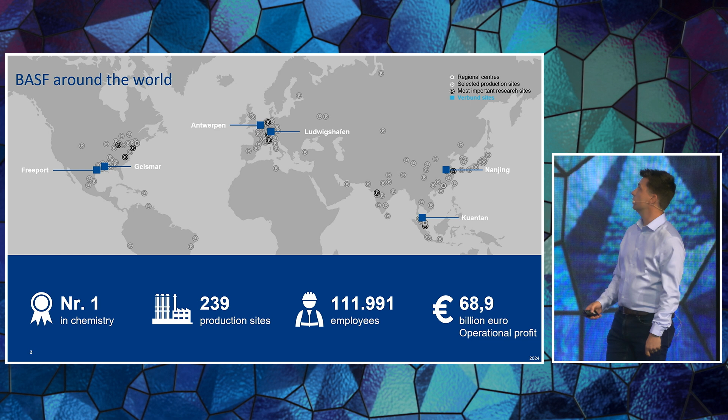For this use case, we will focus on BASF Antwerp. BASF Antwerp is the largest chemical production site in Belgium and the second largest of the BASF group worldwide. This BASF Antwerp covers 6 square kilometers.

We have more than 50 plants. These 50 plants are maintained every day by more than 3,700 BASF employees, approximately 1,000 partner employees, and 2,000 contractors. All these plants are connected with each other with 65 kilometers of road.

54 kilometers of railroad, and more than 1,000 kilometers of pipelines. We have a turnover of almost 6 billion euros, and because we are the second largest of the BASF group, we invest annually, in the year 2024, more than 248 million euros.

To get an idea of the size of our PI environment, we have 220 PI interfaces which are collecting data over the whole site. And all these data points, the 275,000 tags, will be stored in our PI historian. We do it for a long time.

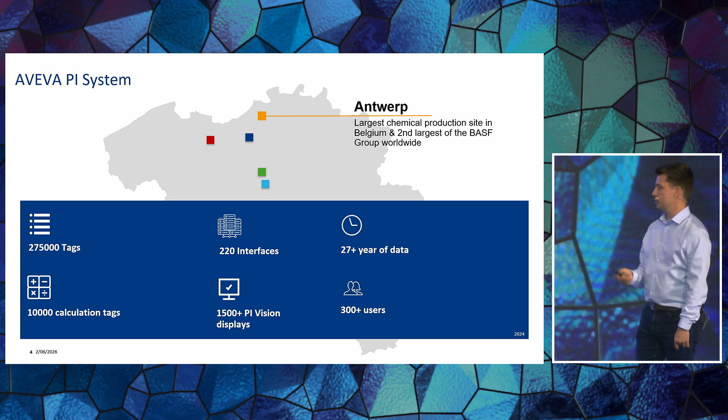Okay, this one is from me. Thank you. Well, this morning you had a presentation from Michael from the Batenburg group, so I'm not going to repeat that, just our company.

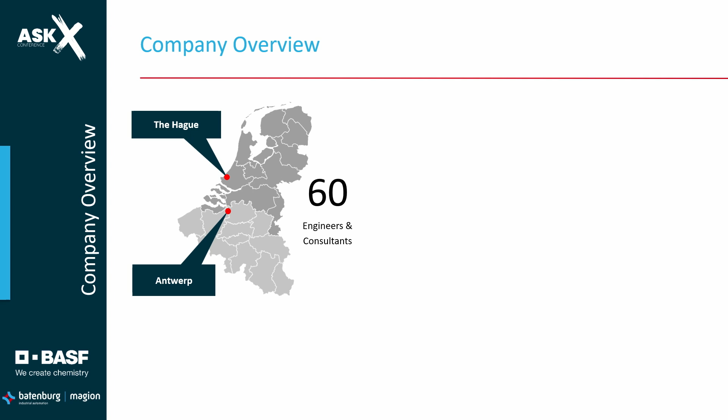Batenburg Magion is a company of 60 engineers located in 2 places in the Benelux. We've got 3 departments. The first department is process control, so actually controlling the plants with PLCs and DCS systems.

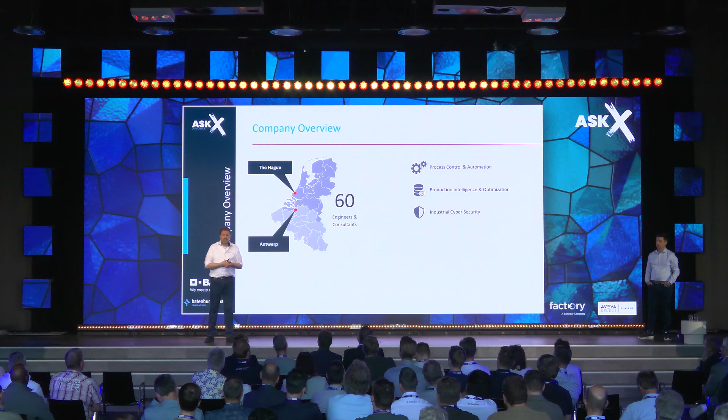The second is production intelligence, which is my field, and that's getting data out of the plant into a database and doing fun stuff with it. And the third, also very important, is cybersecurity. We've been active in this field for quite a long time, across a lot of different domains.

Well, enough of this. Most important, what you think is the use case itself. So I'm going to hand it over to him. Okay.

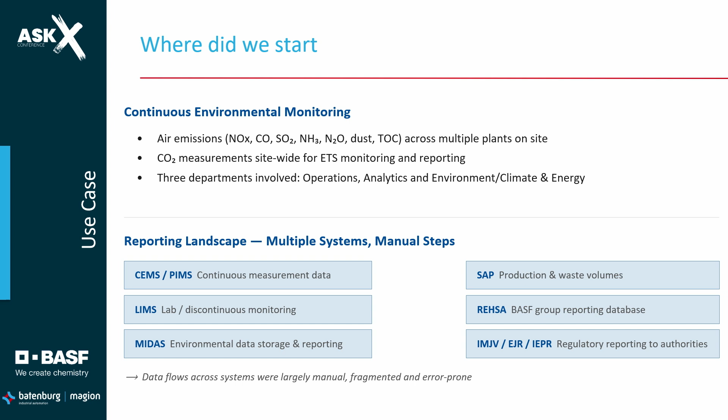Before we started the project, BASF Antwerp already monitored environmental tags and measurements, like air emissions and CO2 measurements site-wide for ETS monitoring. For the reporting of this, three departments are involved: operations, analytics, and environment, climate, and energy.

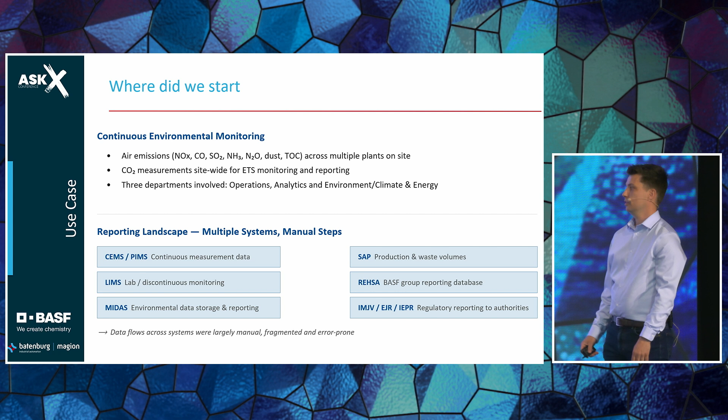Across the three departments, we stored all the data in multiple systems, like LIMS, the Labo data, MIDAS, the environmental data storage, or the PI system for production data, and so on. With multiple systems, getting all this information into one report was a lot of manual work that is fragmented, and the chance of an error was really possible.

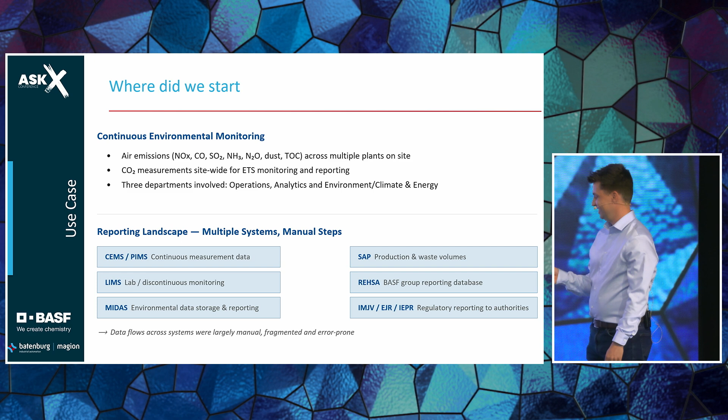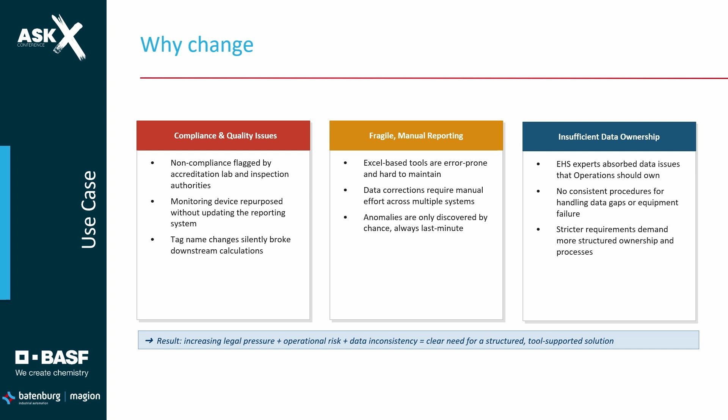Why the change? Because we want to be compliant with the new European environmental law, the ETS2 law. Also the fragile manual reporting - Edward will tell more about it, but the manual reporting will be gone. And before the project, we had insufficient data ownership, and now we have a really transparent, structured data ownership: who is responsible for which data, and it will be validated.

Main question: why Batenburg Magion? They have deep expertise in PI systems, a proven track record in complex technical implementations. Their current knowledge of the European environmental law was also a big plus point for us. Efficient communication, and 6 years ago we already did a collaboration with the migration of our old PHD system to our new PI system.

Okay, well, we're talking about emissions, gas emissions into the air. But what are we really talking about? Is everyone on the same page with that? Therefore, I'm going to give a quick overview of what it comprises. It's not everything - it's a huge topic with a lot of rules and regulations. This is just a small part of it.

But first of all, gas emissions - what are we talking about? Well, it's gases that we put into the air which are not too good for our environment. Examples of those gases are CO2, SO2, and NOx, nitrogen oxide, which especially in the Netherlands we hear a lot about in everyday news.

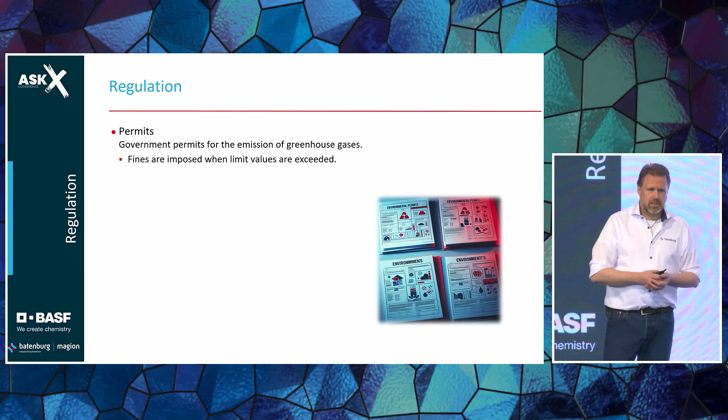First of all, there's regulation from our governments, done in two different ways. First, permits. When you get a permit, you can emit a certain amount of stuff, but if you go over that limit, you will pay a fine. It's a hard world - if you do bad stuff, you're going to pay.

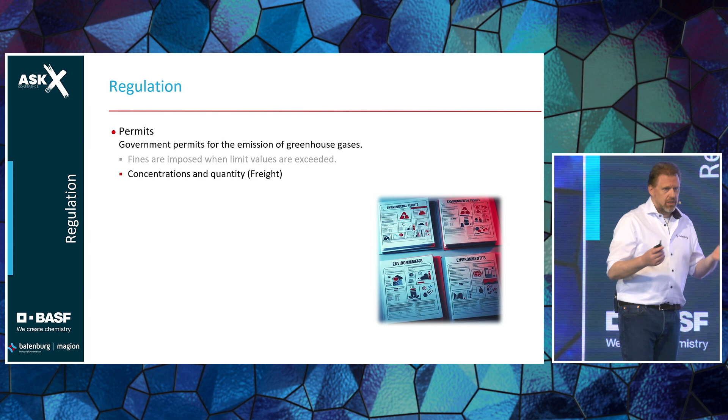We also have to talk about concentrations and quantity - both can be limited. Concentrations because you don't want to get all the birds out of the sky, and the total amount is for the entire planet, very important.

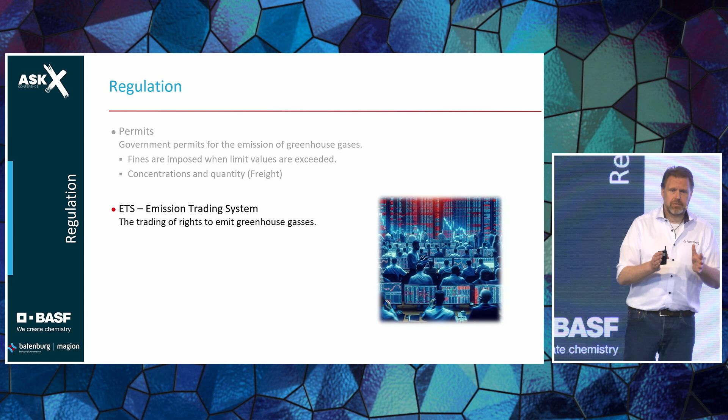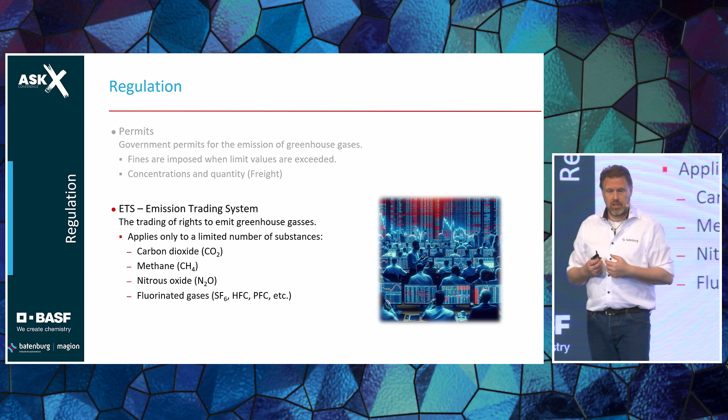For the people who don't know that, we call that freight. So freight is a term I'm going to use more often in this presentation.

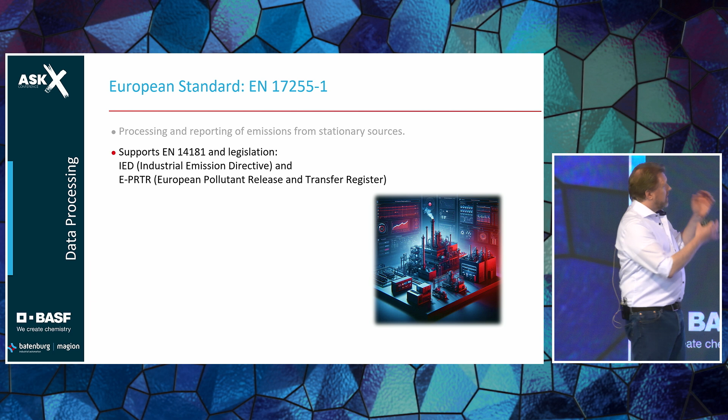If we talk about emissions, this is the European standard that you have to comply with. Not only this one, but this is one of the big ones. There are a lot of different kinds of regulations, but this one really is important, and it's about emissions from stationary sources - so not a car, not a plane, something that stands still, a plant. Like I said, it supports a lot of different rules, regulations, and other norms, so it's quite a big topic to talk about.

But this specific one describes three things. First of all, how do you collect the data? The plant is generating data, but it has to be collected. Well, there's something called PI Data Archive from the AVEVA company. It's a very good system to store your data in - it's the perfect means to store this data. So that one is covered.

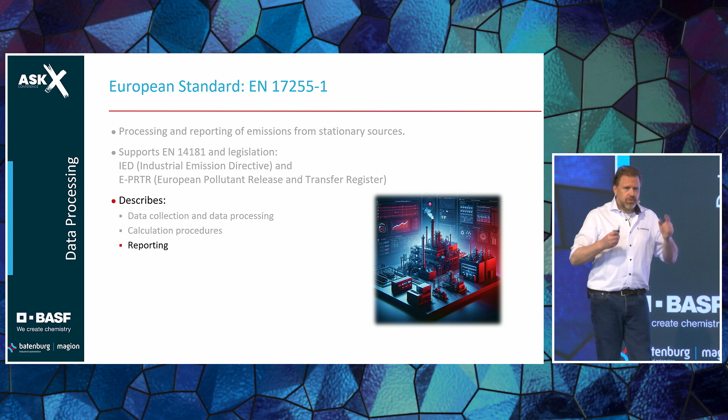The second one tells about which kind of calculations you have to do, and how to do that - we're going to talk about that later on as well. The third one is what you've got to report. You've got to report to the government, so they will tell you what to report, how to report it, and when.

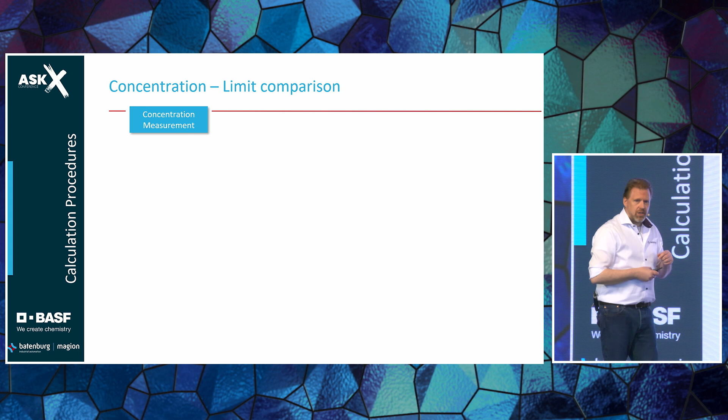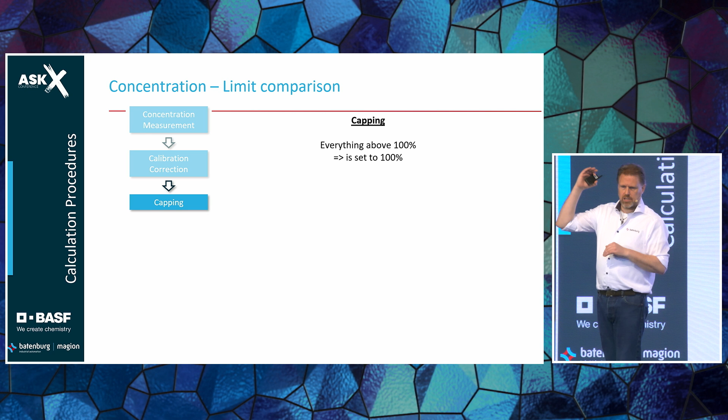Okay, we're talking about calculations - that's a big part. This is difficult because we're going to talk about a concentration measurement. Let's say CO2 - CO2 is measured within your stack, and it's got a percentage. The concentration measurement has to be corrected. The measurement is calibrated for a certain range, and if you want the exact value, you have to do a calculation. When you have done that, everything above 100% will be topped off to only 100%, because they say above 100% is not possible.

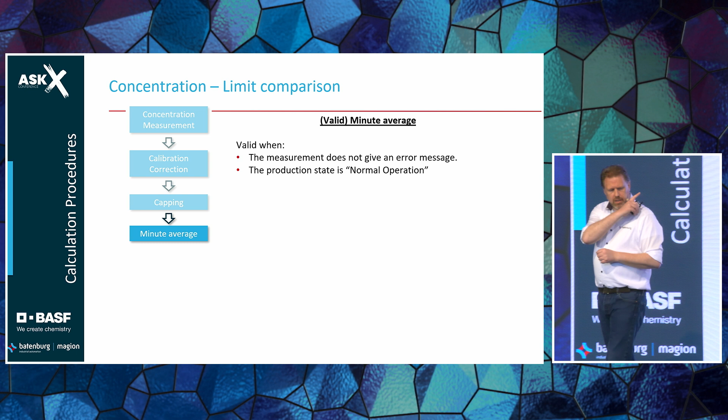Then, a minute average - there's one word there above, valid. A valid minute - what does that mean? Well, a valid minute is a minute average when your concentration measurement doesn't give any errors and you're in normal operation. Normal operation - that means there is abnormal operation as well?

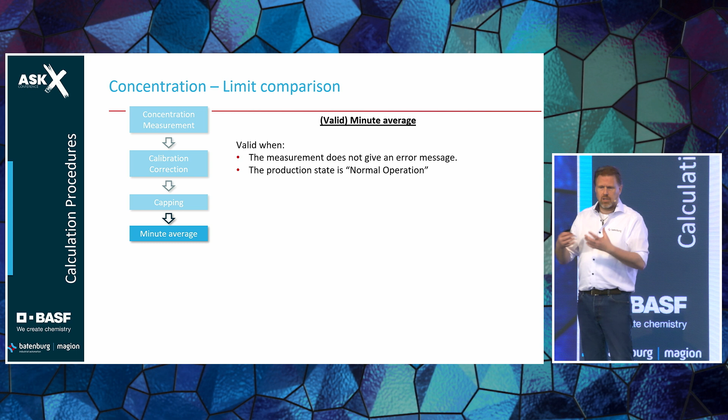Yeah, indeed. It's called startup. Look at your car - if it's still a combustion car, if you start it when it's cold, it will use a lot more fuel and emit a lot more CO2. For a plant, it's exactly the same, and if concentrations are measured during that period, each and every time you will go above the actual limits. So no plant would ever be started up. That's why the rules say, only during normal operation, when you're steady, do you have to report your concentration - concentration, not rate. So only in normal operation and when the measurement doesn't fail.

You've got a minute value. Otherwise, you don't have a minute value. Be aware of that - if there are other errors, there is no minute value.

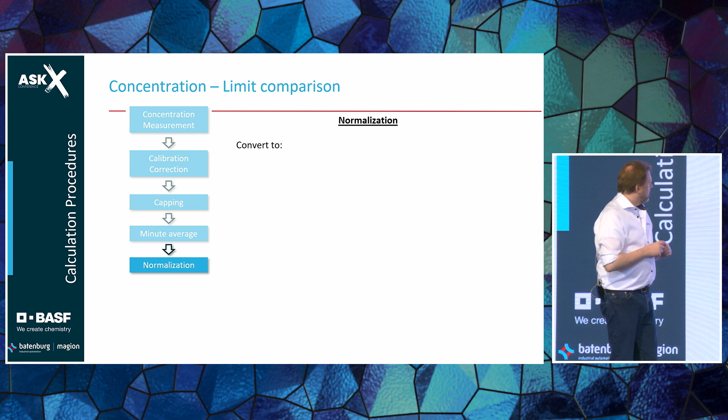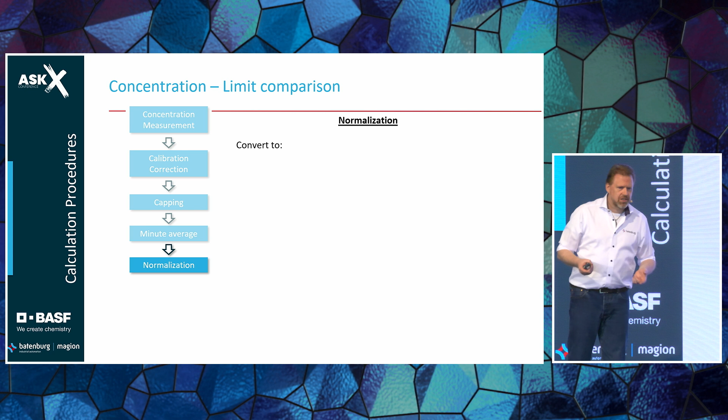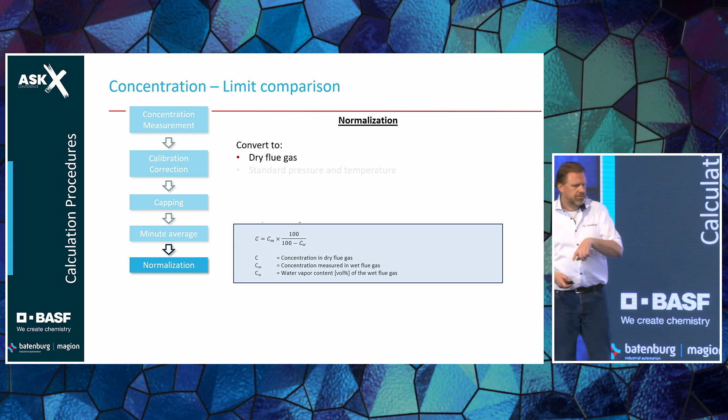Then we're going to do normalization, because the limit values are based upon a standard gas - normal pressure, temperature, not the circumstances in your own stack. So we have to do some calculations to compare apples with apples. First we calculate the dry flue gas, then standard pressure and temperature, standard oxygen, and convert it to milligrams per normal cube. Just a couple of calculations.

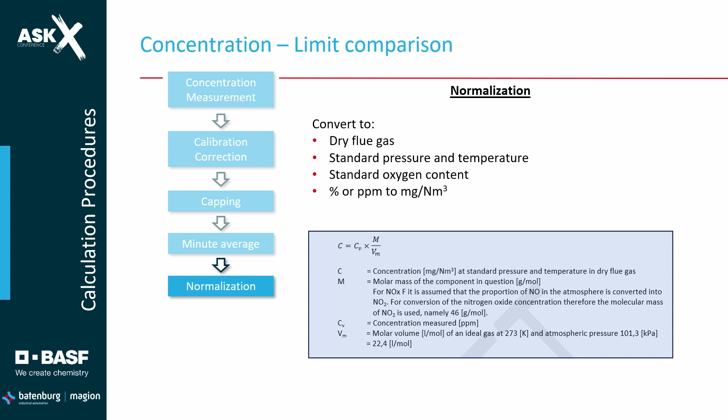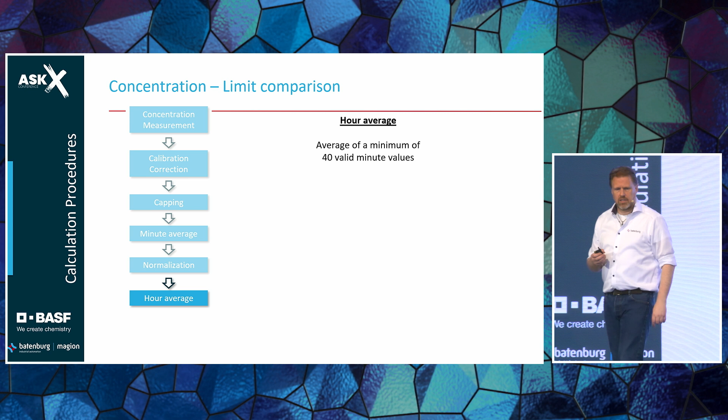If you've done that, you can create an hourly average. The strange thing is, you've got a valid minute - if a minute is not valid, it's not there. So the hour average says you have to have at least 40 valid minutes before you can create an hourly average. If not, that hourly average does not exist. Strange, but that's because if you're in a startup, you don't have to report it. So don't report anything.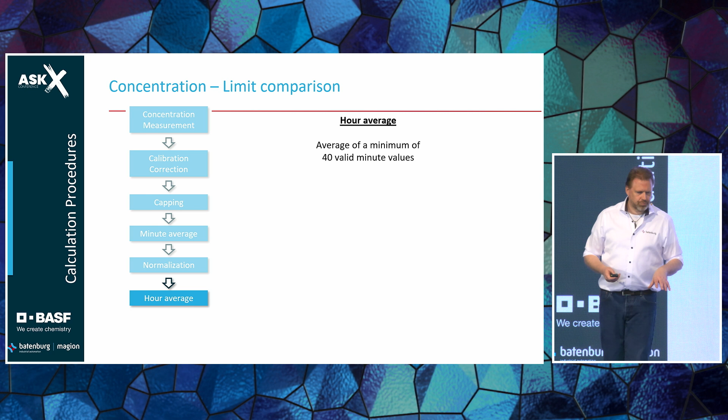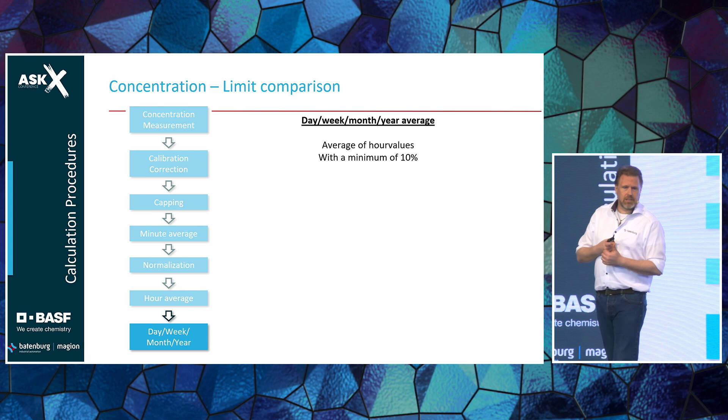With those hourly values, a day, a week, a month, and a year value is created. So maybe a couple of you think, okay, if my measurement isn't working, I don't have a minute value, no hour value, no week, month, or year values - I don't have to report anything. Yank the cable out, I'm done. Sorry, no can do. Government thinks of everything.

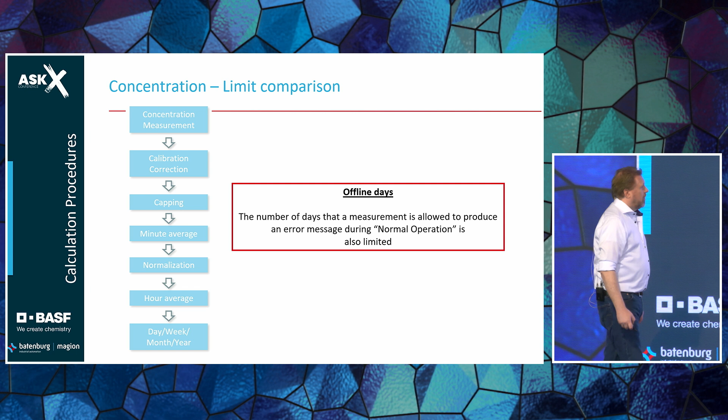So this is the concentration, which is compared to limit values out of your permit. Second, the freight, the total amount. Well, first of all, you start with exactly the same concentration measurement, exactly the same one.

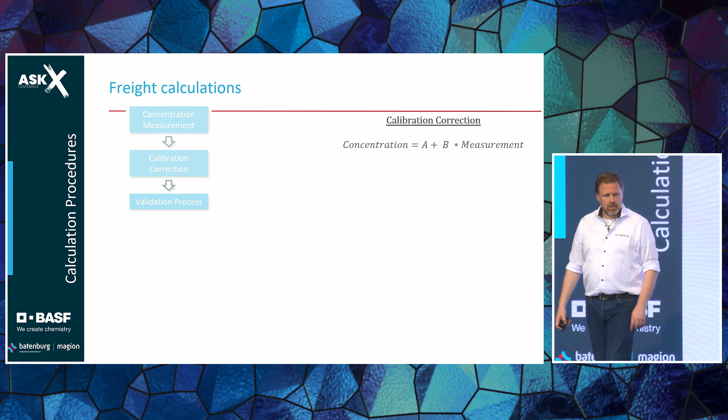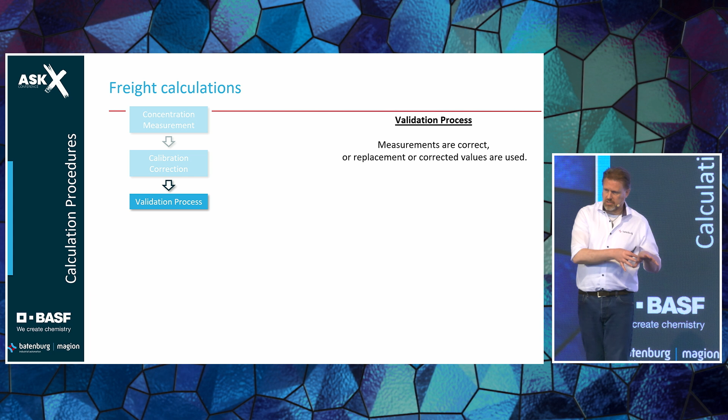And then you do calibration correction, exactly the same step. But then a validation process - I've got to talk about that one. What is a validation process? It's if your values are not correct, and you have to detect that something is not correct, and then you can use a replacement value, or do a manual correction. What you're doing is, if the data is not correct, you're going to correct it.

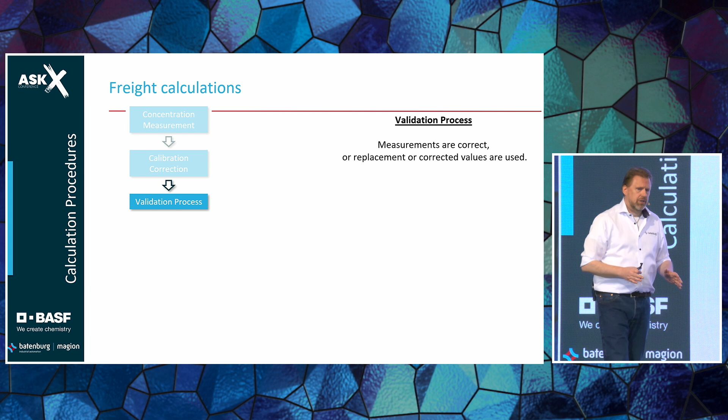Because we need to report freight every time. No matter if your stuff is working, no matter if your plant is starting up, each and every single gram has to be reported. Everything. So make sure your data is okay. And if your data is not okay, for whatever reasons, you use a replacement value. That's a validation process.

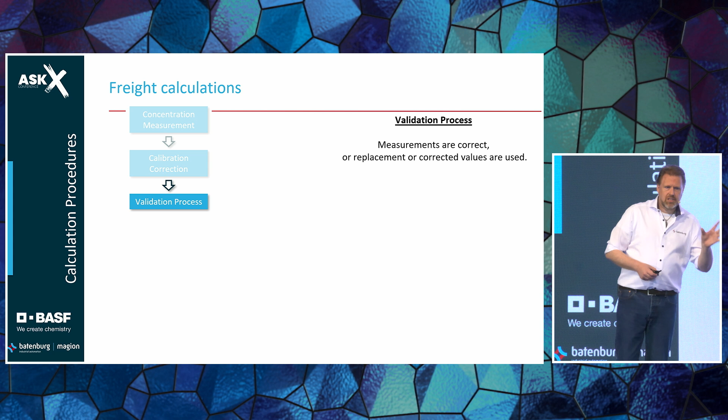Looks the same as with concentration measurements, yet totally different. But after that, we go to this normal standard normalization and averages over an hour, which uses all minutes because everything is okay.

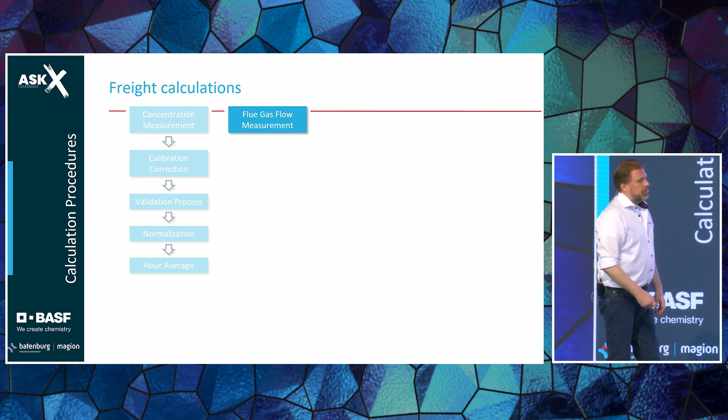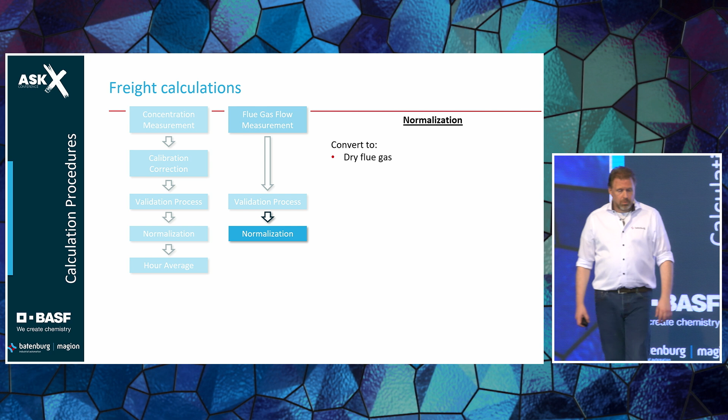We've also got the flue gas flow. It's a flow measurement, so it doesn't have any calibration corrections, but it does go through the validation process, exactly the same as the concentration. It has to be normalized - different calculation, but almost the same.

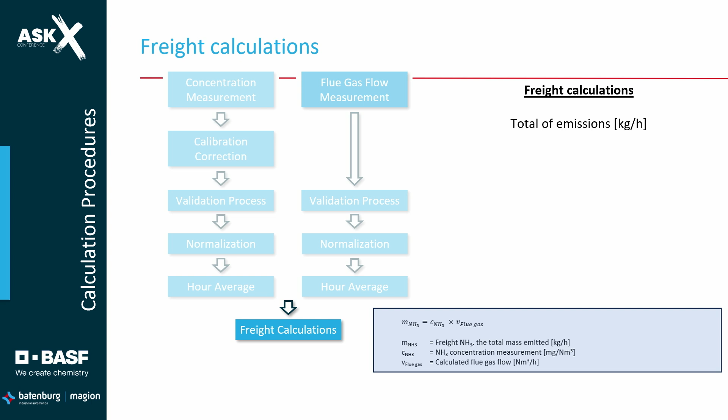We've got an hourly average. Combine those two, and you've got the freight for an hour. And after that, you can create a day, a week, month, and a year, with all hours, because all the data is there.

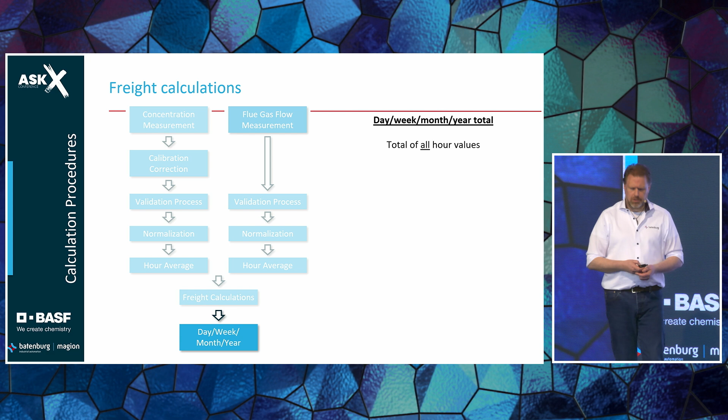Okay, now we know what we've got to calculate, which sequence we've got to calculate it, and how are we going to do that. Well, the solution we found was to use the Pi data archive combined with PI Asset Framework, AF, to create two applications, two web applications. So be aware, the basis of this all is AVEVA Pi.

But we got two web applications, and the first of all is the validation tool. We talked about the validation process - you have to have something that facilitates that. So what does it do? Well, it detects if something is wrong with your data and will notify you, hey, this data might be wrong, have a look at it.

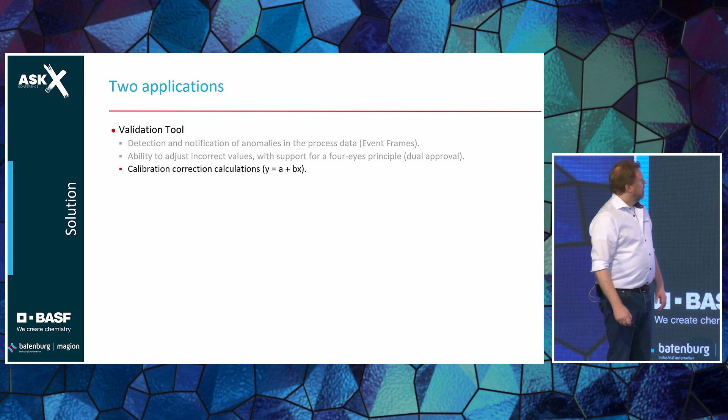And you have to have the possibility to do corrections, because we said if the data isn't correct, you have to correct it. So you need something to do that. It does the calibration correction calculation, the very first calculation.

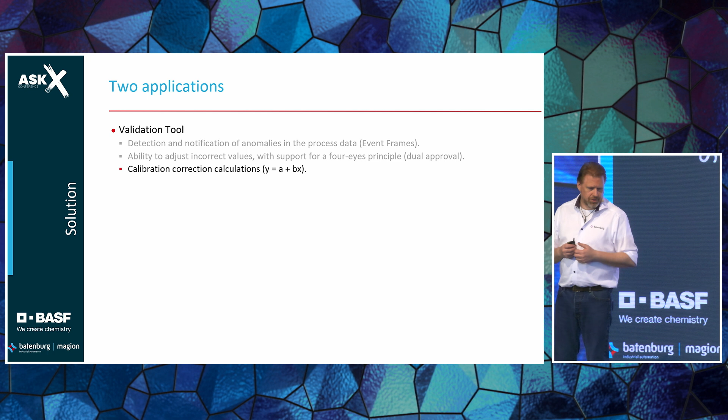And why did we put it in there? Well, we said the validation tool is all about the measurements. Each and every single measurement is treated there, is molded into something we can use. So this is part of it.

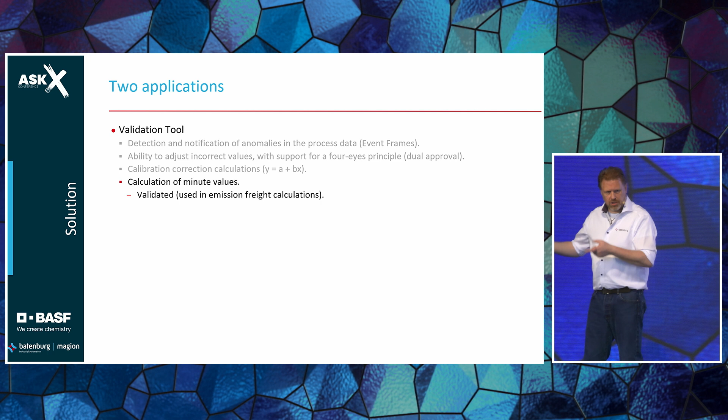And it calculates the minute values, which is, of course, the validated ones used for freight. But also, because it's all about the measurements and everything compact in one tool, so also the valid ones for the concentrations.

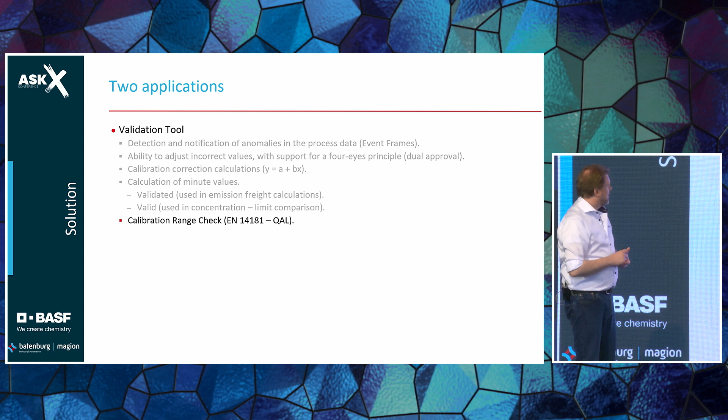And for the people here who are in the environmental department, it also has the calibration range check. Didn't talk about it, left it out of this presentation because it's a whole other topic. But for those people, it's in there. If you don't know what it means, I can tell you later on, or ask your environmental department.

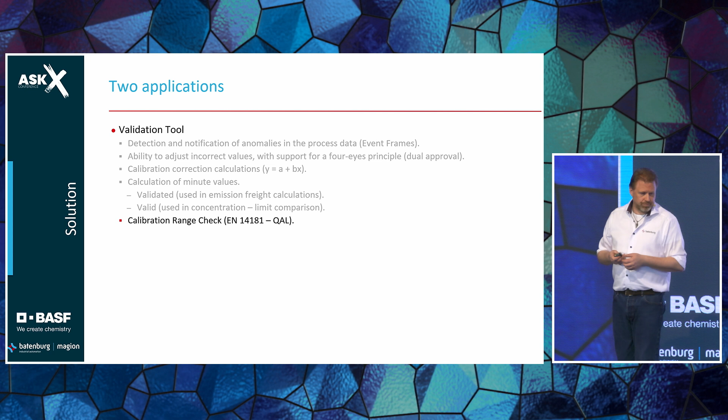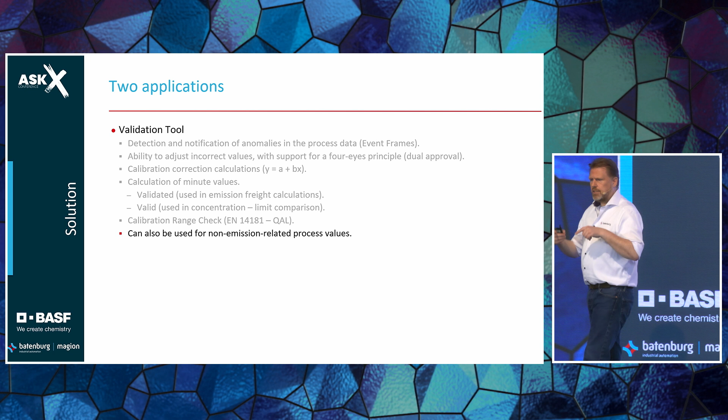And one of the big features of this is that it also can be used for non-emission data. It's a tool to get your data right. So if you have a production report, you want to have right data as well. This is used for it as well, so it's now multi-purpose.

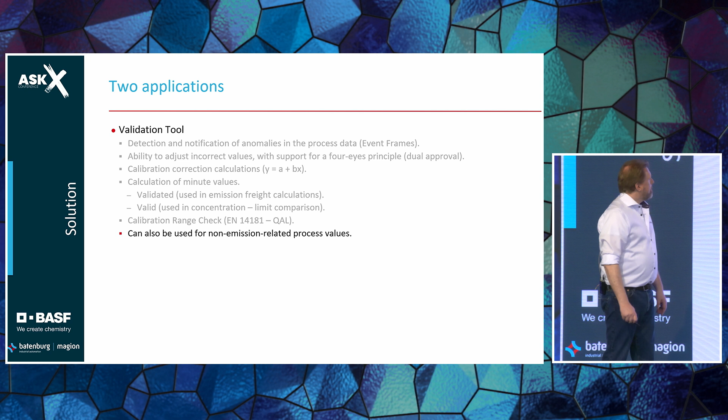The second tool is emissions, that's the whole purpose of the project. It does a lot of calculations for the concentrations and the freight, and of course reports everything prescribed in the regulation, because that norm states everything. It also does some detections, because if you're going above a limit, your environmental department wants to know - it's going to cost them. So that's an important part of it as well.

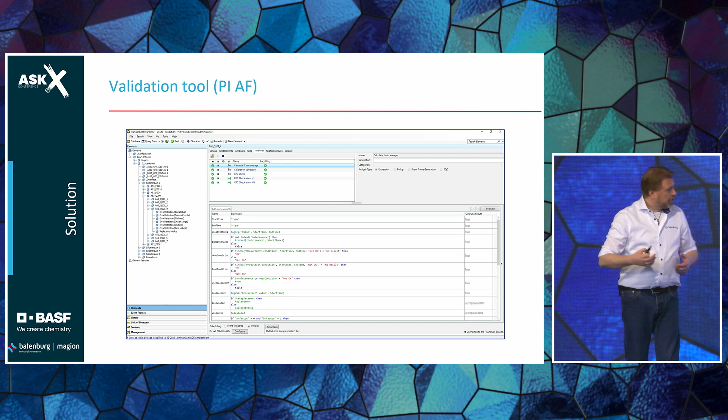So how did we do it? Well, the people using the PI Asset Framework on top of PI Data Archive will recognize this. This is your data model, is how everything is created in PI AF. It's the tool we use to contextualize your data, but also add calculations. And if you can see here, there are also error detections - all the detections of data that might not be okay, it's in there as well.

So if you want to extend it, BASF can do that - just add another error detection.

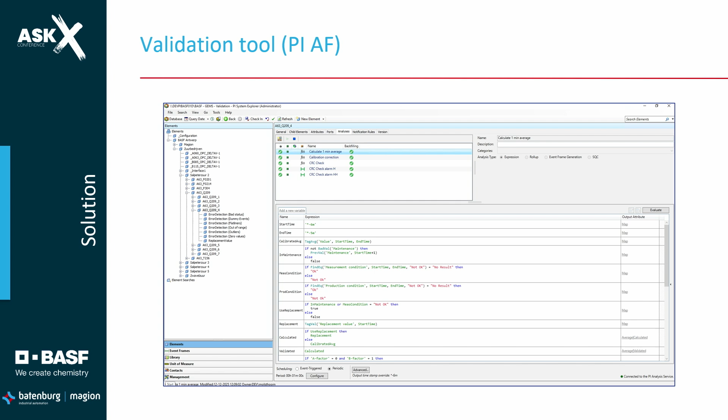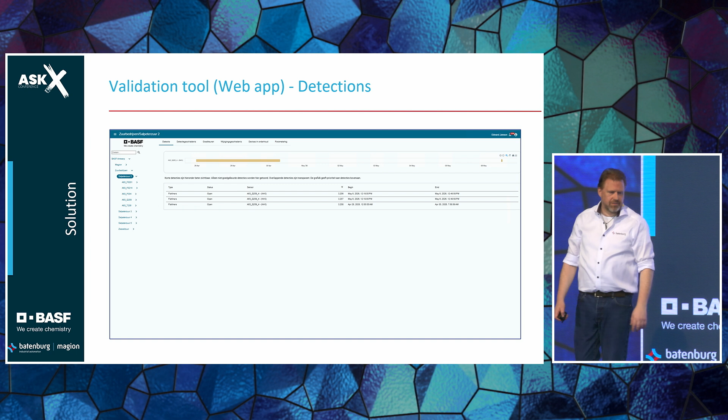And well, this is pretty straightforward - we've got a flatliner, and this application will be able to automatically or by hand change the values that are missing and then get real good data.

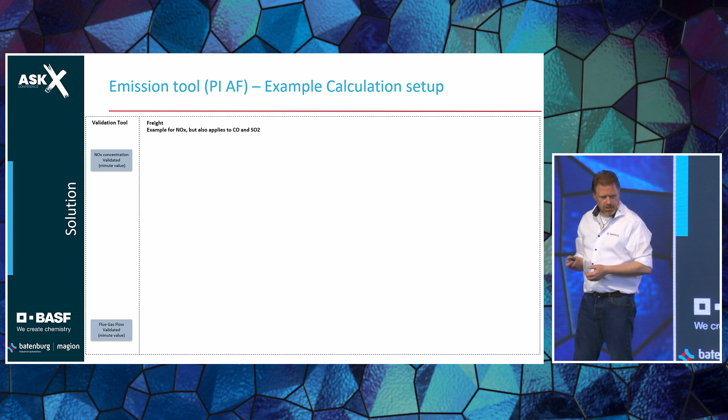Now to the environmental, so the emission application. That's a second web application, also built on top of PI AF. But first of all, how did it all work? Well, first of all, we're going to start with the concentration and flue gas measurement. Those are used in the freight calculations I've shown you. So the first calculation is to normalize them.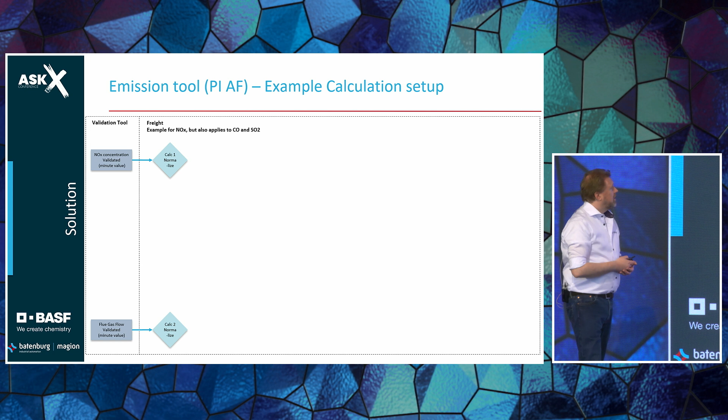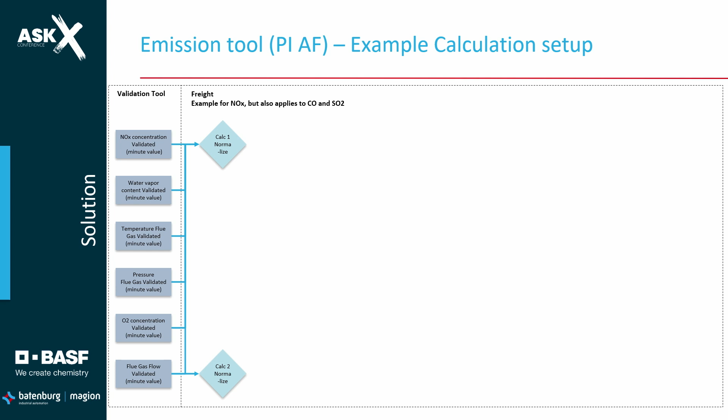Be aware, those are coming from the validation tool, so every other calculation in the validation tool is already done. Now the emission tool is going to do the normalization - standard pressure, temperature, oxygen levels, things like that. So we need other measurements as well. And here you can see that this is different than the validation tool. The validation tool is all about the measurements, and each measurement is treated individually. Here, everything is coming together.

Well, we get some minute values, which are normalized, then hour values. With these hour values, we can calculate the freight. And with those hourly values, we get the day, month, year values. So that's the idea, that's the theory.

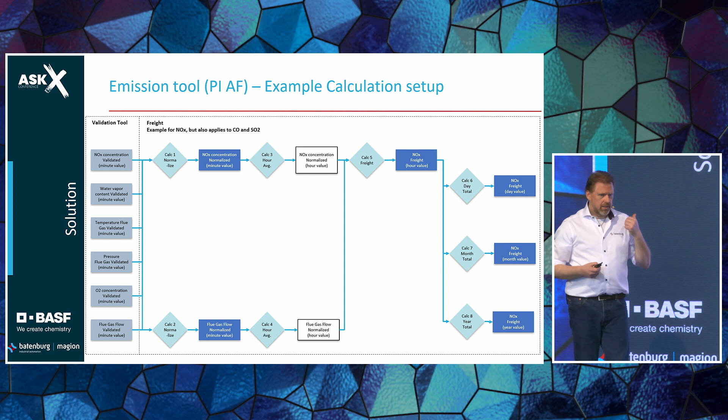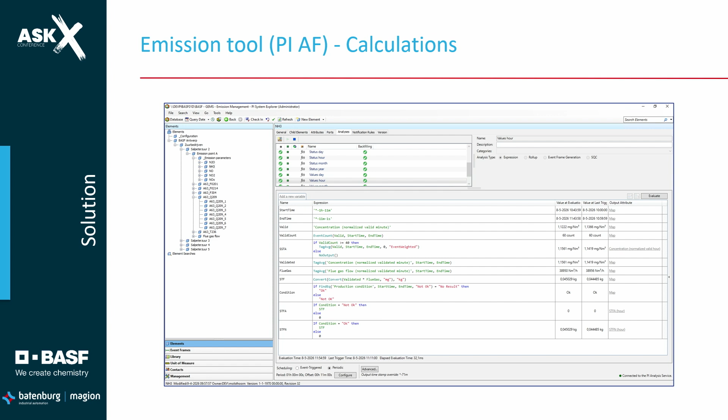Where are we going to put it? Well, PI AF, of course - it's very good in doing calculations, so these as well. So if you can see here, right again, there's a hierarchy created especially for getting your information out of it, and all the calculations that are needed to do everything. And yes, some of them are quite easy to read - I'll touch that topic later on.

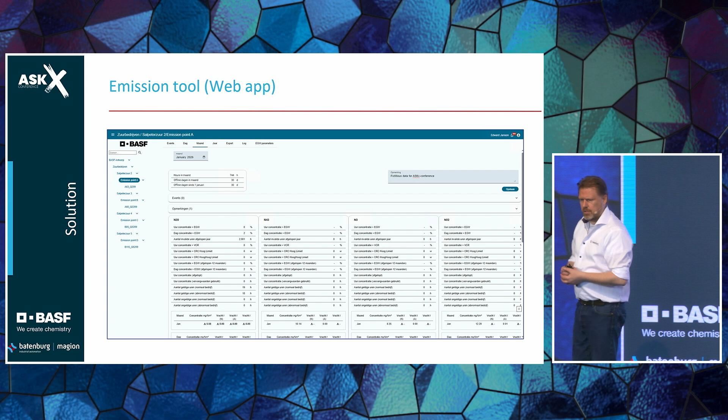Here's the web application. First of all, on the left, yet again, there is the hierarchy, based on top of PI AF. So if BASF says, okay, we're going to add other emission points to PI AF, it will automatically pick it up. And if you select an emission point, you get all the data.

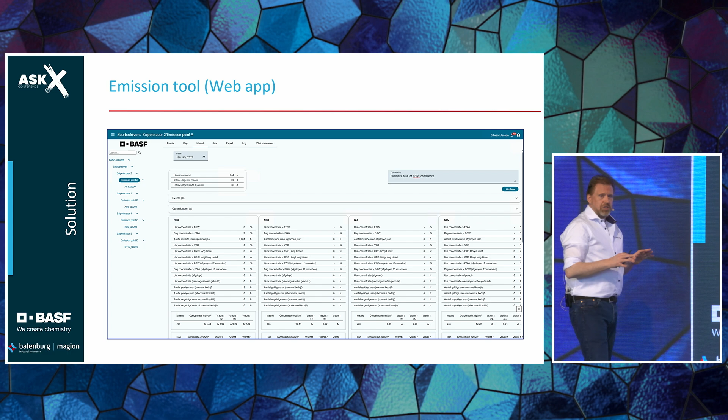Don't look at the data itself - it's, like I said, fictitious data. I was allowed to show you a lot, but not everything. So here it is - all the data you need to actually go into an audit and report to the government, everything they prescribe that you need to have.

And this is the last slide - which considerations did we have prior to this project? How are we going to solve it and why? Well, first of all, we needed a separation in concerns - so a validation tool, all about the measurements, and an emission application, which is used to report to the government.

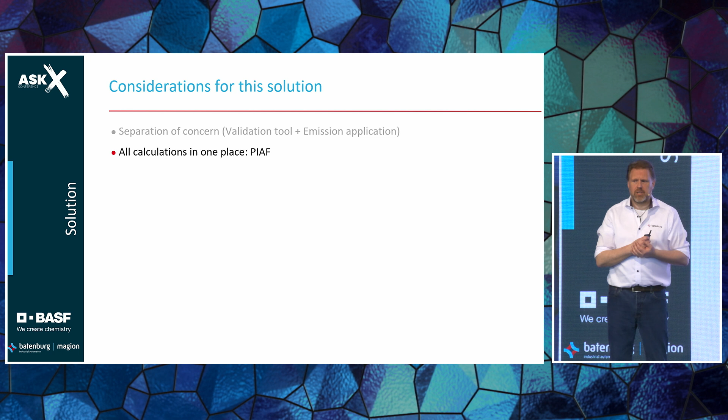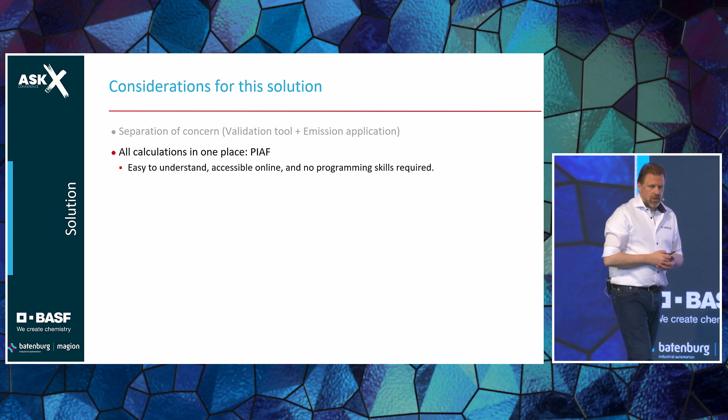And like I said, PI AF is the basis of everything - all calculations are in there. Why? Well, PI AF is easy to use, easy to read, and no programming skills needed. So if there is anything, it will show up. But also, because it's easy to read, it's easy to certify. The government says, okay, if you've got a tool, it has to comply with our rules, and you are obligated to show us that it actually does the job it's made for. So there must be a third party, an independent third party, to certify it.

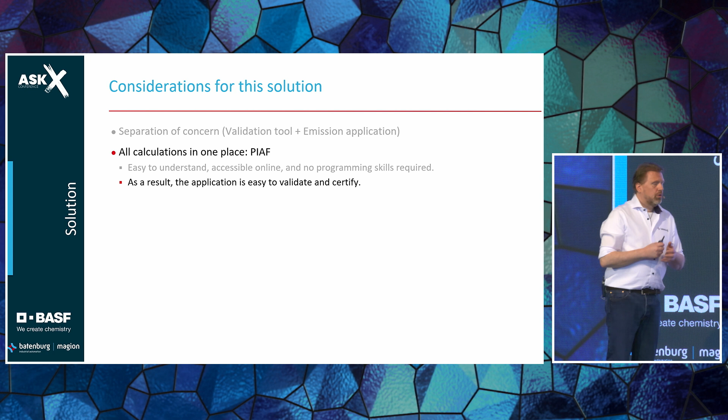Well, try that with your code in .NET, which is compressed and nobody can read it. In PIAF, it's easy to read, easy to validate, and easy to certify. Which we've had, André, at the BP plant, we also did a similar application, and yeah, it's certified because it's easy to read. So PIAF does a perfect job for that.

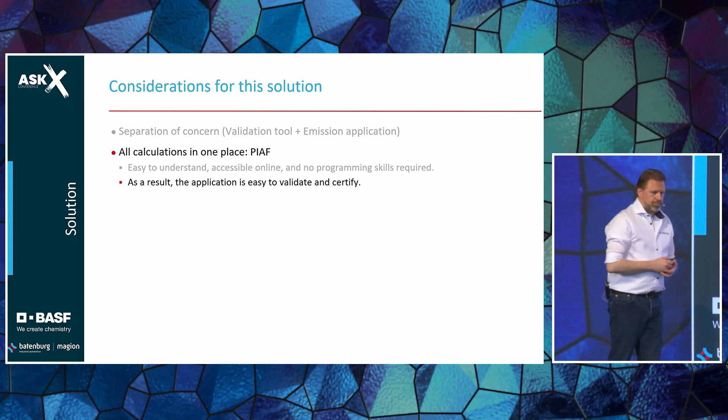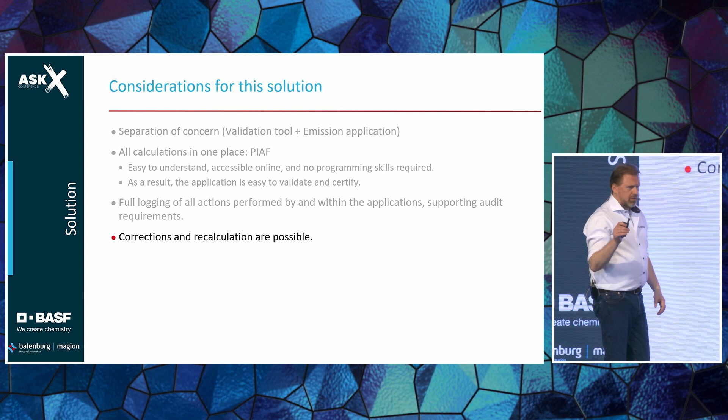Also a very important thing, everything has to be logged. Why? Well, you're going to get audits. And when somebody does a change in the validation tool, so you do a correction, all the calculations based upon those values has to be redone. And everything someone does has to be logged. But because we do corrections and recalculations, every calculation has to be done as well, and we have to show the auditor these are the calculations that have been redone. This is the value prior to backfill, these are the values after. Complete transparency.

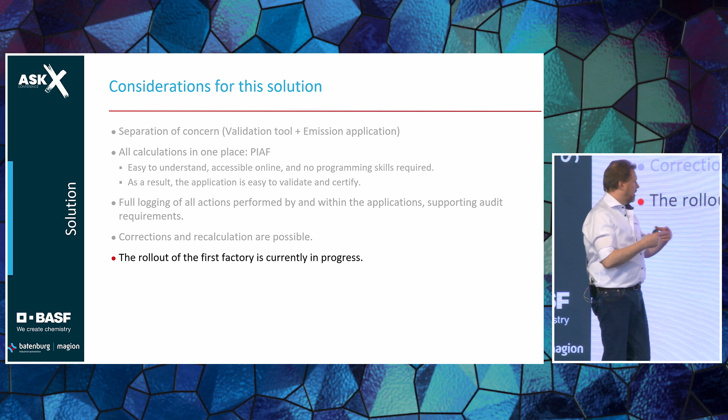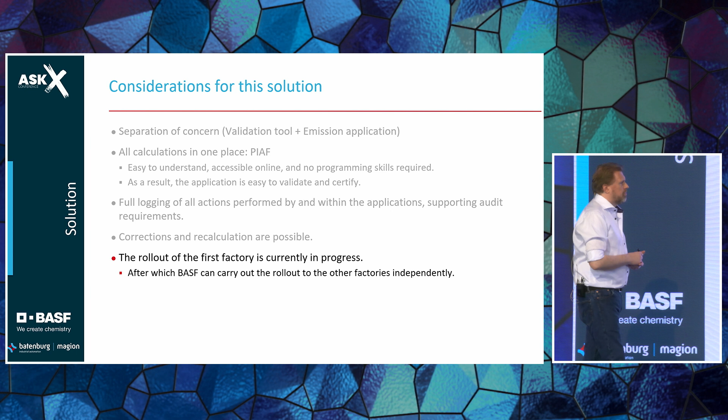And last of all, the rollout. We're now in the phase of rolling out the very first plant, which is quite exciting. And in the future, if BASF wants to, they can do the rollout themselves. It's in BASF, they are the owners of that. They are the ones who can do that, so they don't need us. If they want, we're going to help them, of course, but they can do that independently. That's one of the key factors they wanted as well, create something that is expandable on our own terms. So that's a small overview of what we did for BASF at Antwerp.

Questions? Anyone? If someone has one burning question, you can ask it now. And otherwise, you also have a booth there, so they can also walk to your... oh, absolutely, we've got a booth.

One thing I do want to mention is that this project also made a shift in data ownership. First of all, the environmental department was completely in control, and they were completely responsible for all the data they reported, but also the data they collected. And now, because we got a validation tool, which is used for each and everything within production, so also production data is used, they are now the product owners. They are responsible for getting the data correct. So that's a different way of working that is introduced during this project as well, which is something you want to think about yourself as well.

If I can begin. Indeed, we have now the right person, right place. So the expertise of the production people is necessary for validating the data, and the expertise of the people in the environment department, they can focus only on the reporting and not with the pain-in-the-ass Excel every day. Now they can use this tool and they get the figures automatically.